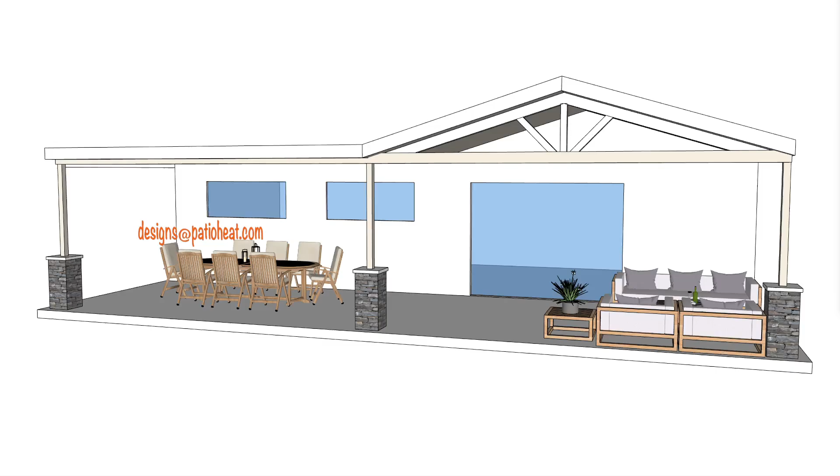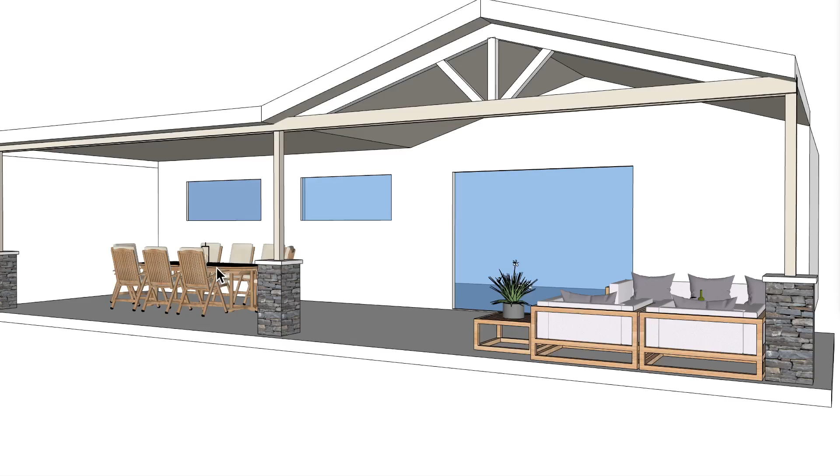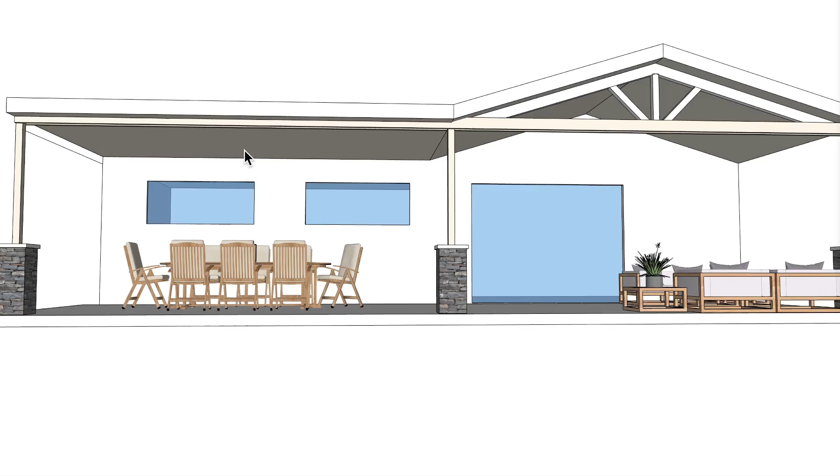All right, so let's go ahead and take a look at this particular application. You can see we have a dining space over here and reclining space over here. This is Alumawood, I believe, on the top section here. So I don't have a complete answer as far as how much weight an Alumawood ceiling can handle. You'd have to talk to the contractor who installed it and/or the manufacturer of the Alumawood itself. But let's go ahead and look at what I would recommend for placement of heaters.

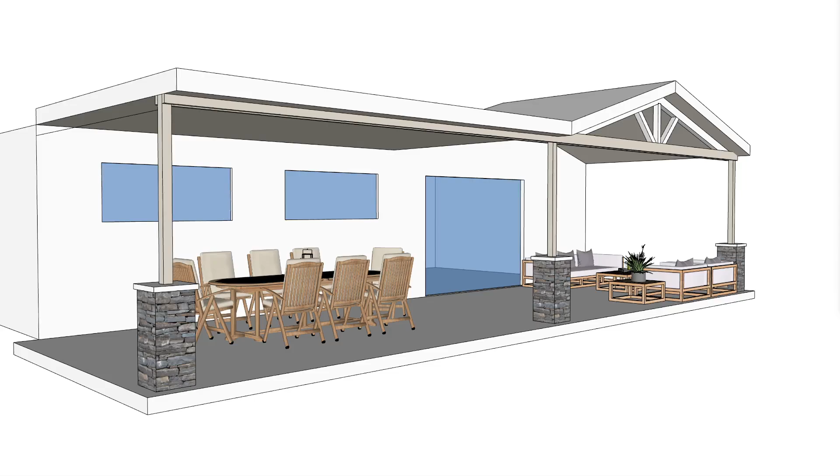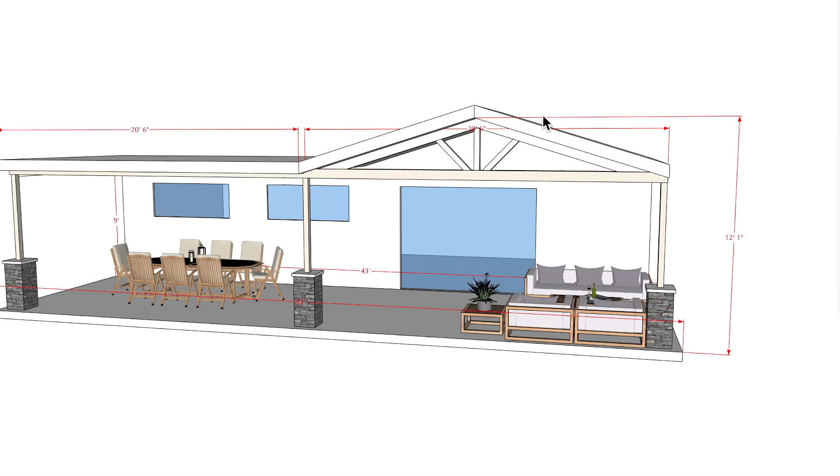Let's go ahead and first of all look at the overall dimensions that I have. So overall dimensions, I have a 9-foot ceiling here. We have a 20-foot 6-inch section over here. And then we have a 20-foot 6-inch section over here from this edge here to this point there. We have a ceiling height of this apex here at 12'1", and overall I think it was 43 feet total. I think that's about it. Let's go ahead and turn that off and look at what we might be able to do.

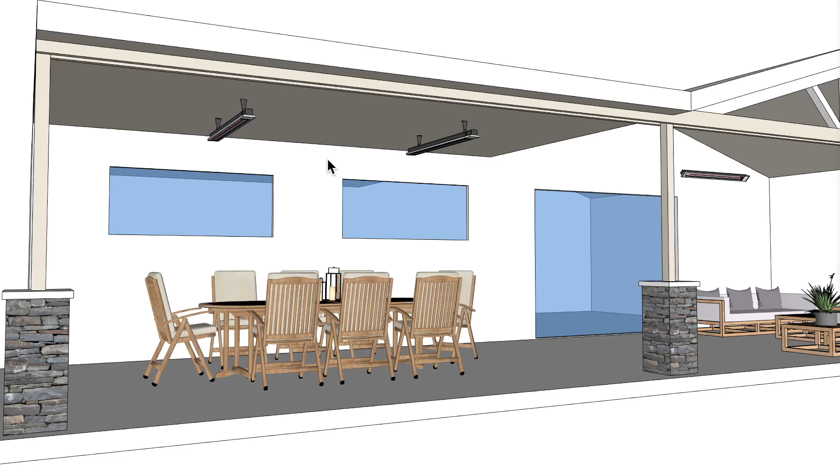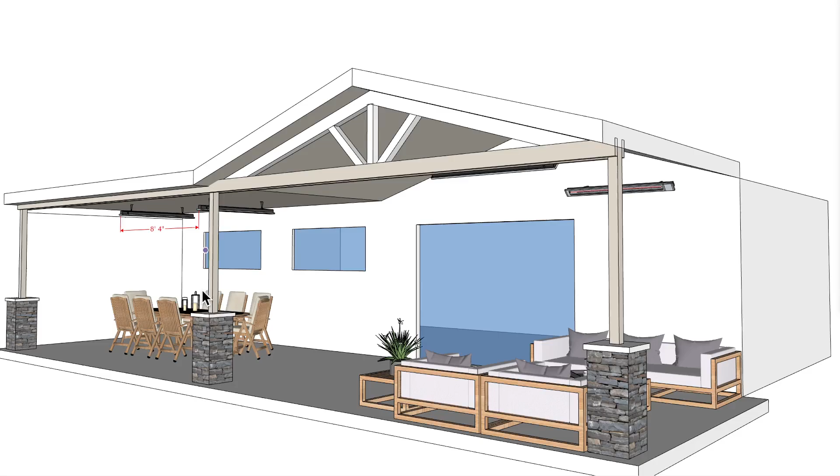So one thing I want to show is probably what would not work, and the reason why I'll show in a second. These two would work here. These are slimline 4,000 watt units pointed straight down. I don't have the distances on here at this moment, but let's put the distance apart from each other, and you can see that the distance is about 8'4", and those again are pointed straight down to the ground. Now, what I have over here is a wall-mounted unit here, as well as the beam mounted over here.

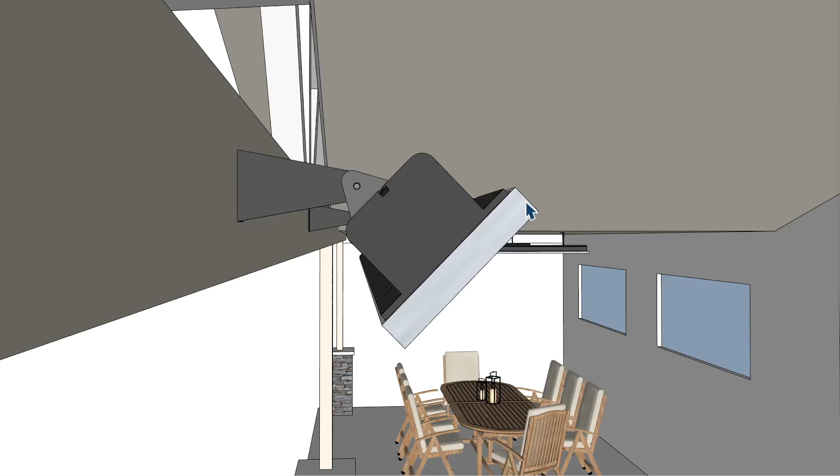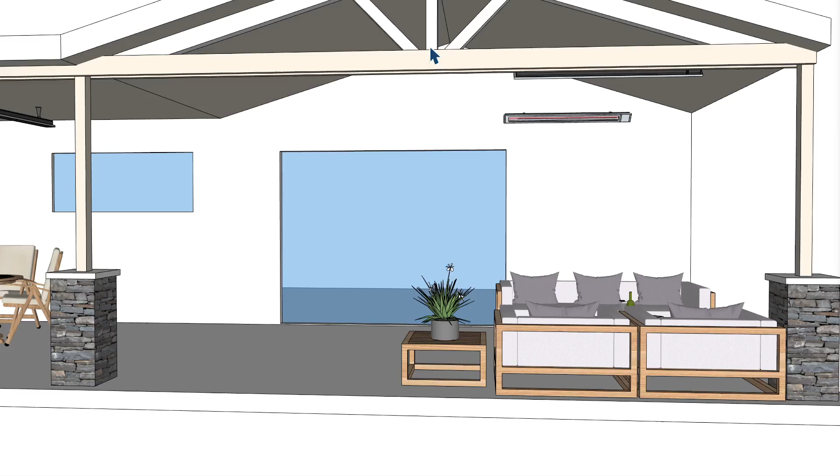So these are vertical surface mounts. And because of that, the bracket itself will only allow for a 45-degree angle. So from straight down to the ground, 45 degrees up is the maximum position it would take. And oh, by the way, I did make a section here. Call this the center point here to the inside edge of the post here, and then I centered the heaters here. But I also made it the same height as this beam here, centered within the beam.

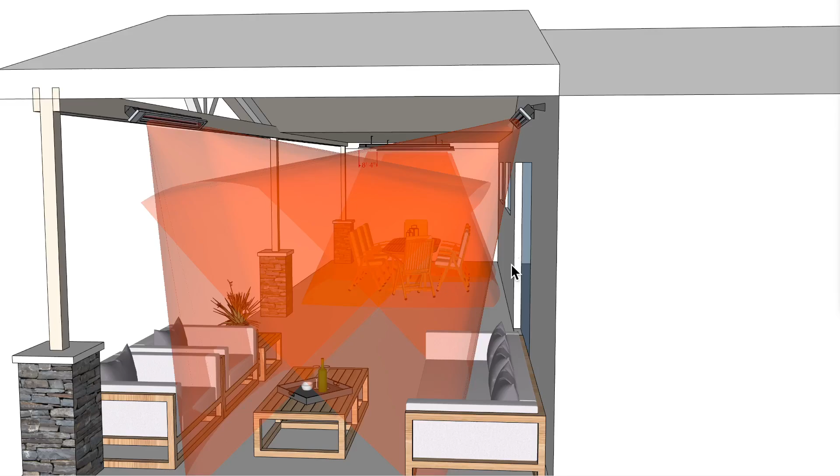But again, if we turn the ray on, you'll see that a 45-degree angle over here is not adequate to heat up the space down below here, nor is it adequate to heat up the space right below the heater here. You need a 30-degree angle, and this bracket will not allow that to happen, so this is not something I would recommend, especially on this side here on the right. However, on the left, this does work out just fine, and it's up to the individual whether they choose these over here or not.

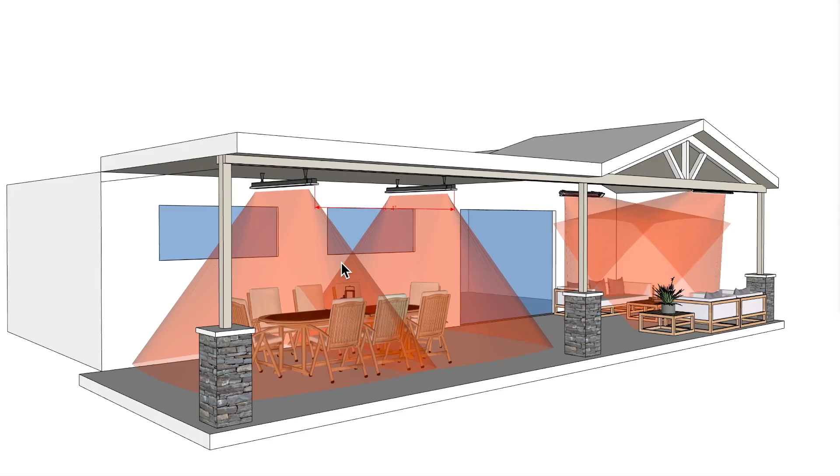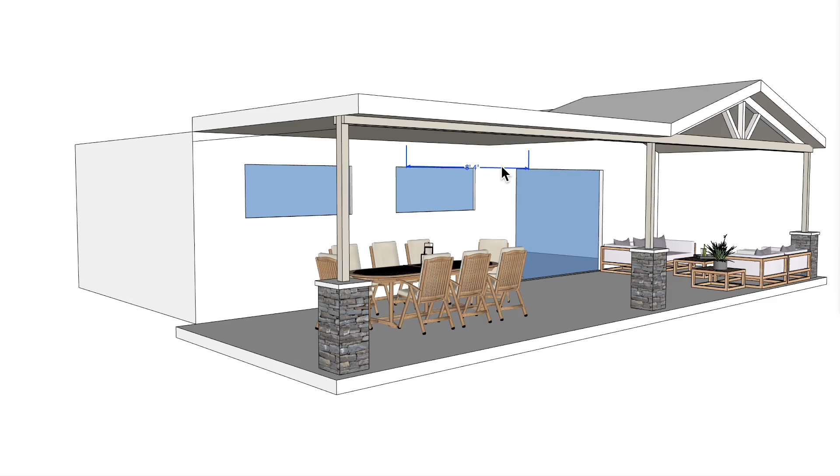And they're roughly about 18 pounds a piece. So as far as can you mount them on the Alumawood surface, you'd have to again talk to the manufacturer and/or contractor in order to get that answer. What I would probably recommend, however, and again the mounting is an issue as far as whether it can handle the weight or not, is probably the C-Series model.

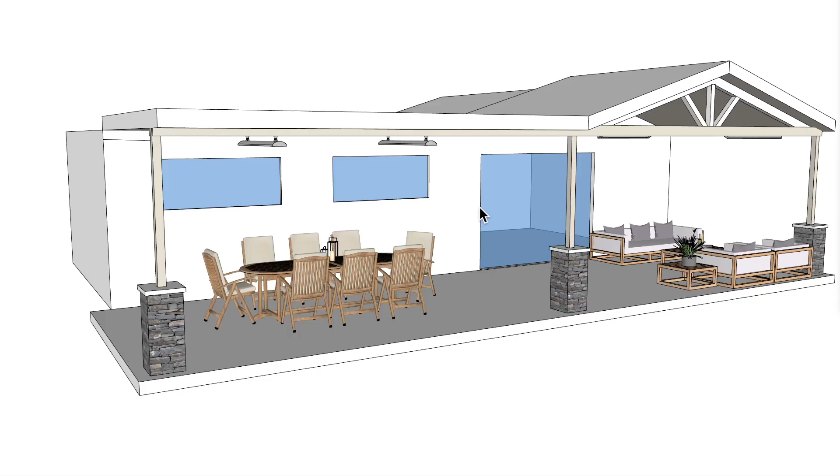The C-Series 4,000 watt unit is perfect for this elevation height of 9 feet off the finished floor, and they're in the same position as I just showed before, centered within the patio structure here, and over here I have them in the same position from this point here center to this point here. That's the center of the heater, and then mounted on the beam going across here as well as over here.

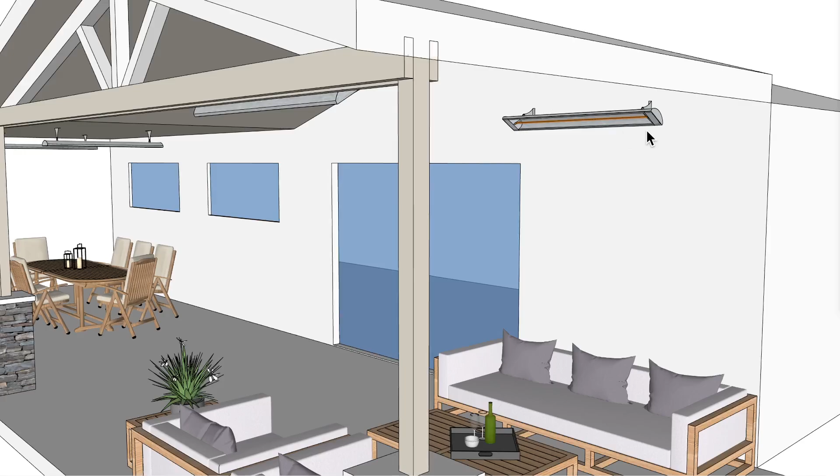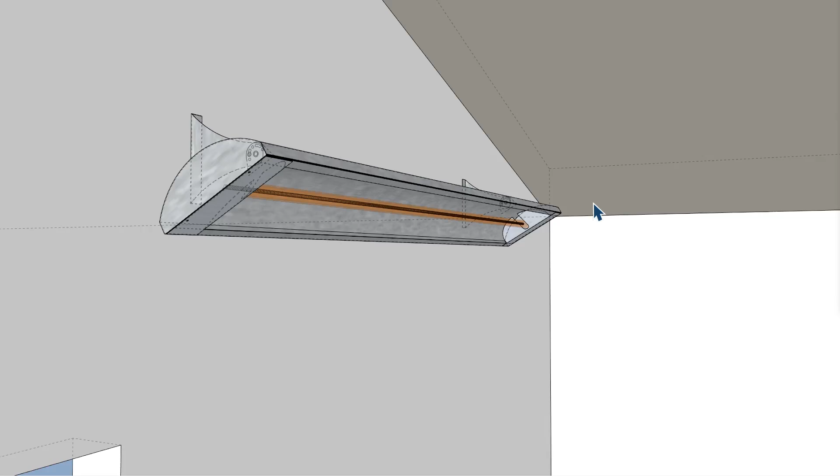Now, the one thing on the C-Series model is that anything above the heater, once you place it on a vertical surface and mount it at 30 degrees, you need to maintain a minimum of 12 inches of clearance. So I'm going to just draw a line right here, and let's see if I can do that here. There we go. I'm going to bring it to over here. And we'll pop it right there, and we'll go 12 inches high just to see what that line would be.

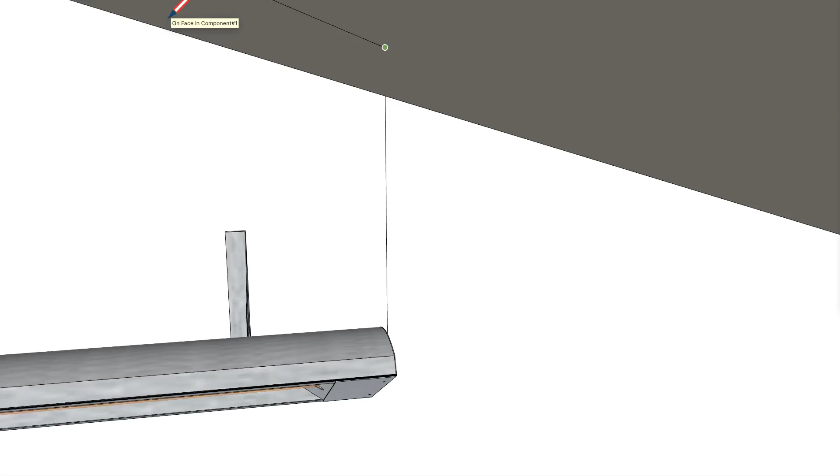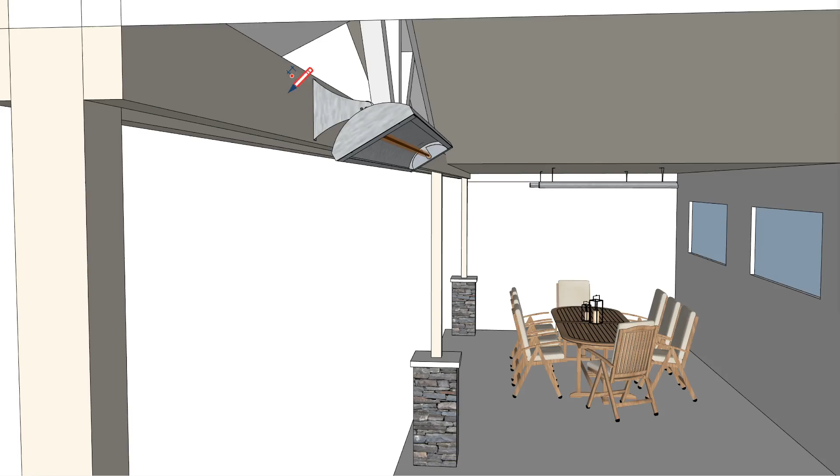And you can see that that line is technically speaking outside of the clearance zone. So this would have to move down. Let's see how many inches I have it lower than. So that's 2 inches lower than what I had this unit here at, the same elevation. Now, to get the exact location of what I have this at, let's go ahead and take a measurement here as well.

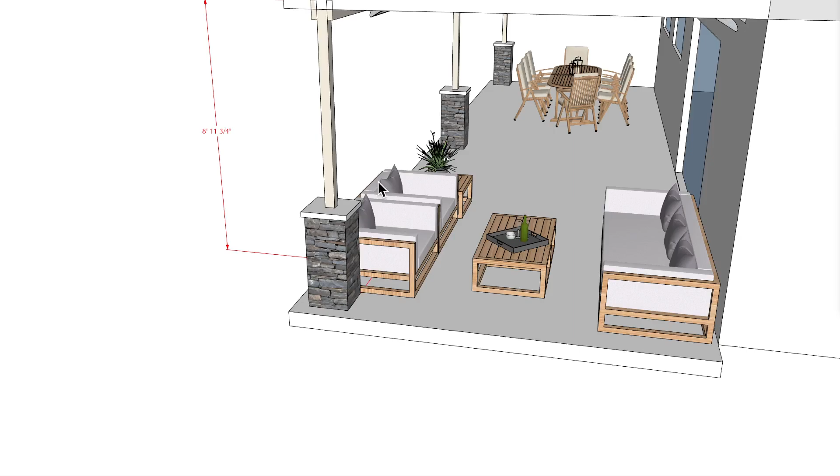So the center point to the finished floor, I have that at 8'11" 3/4, and this is 2 inches. I just dropped this down 2 inches lower so that I can maintain the 12 inches of clearance right above this edge over here on the ceiling portion, which is fine, I think. And by the way, I'm not sure if I mentioned this, I do have these at a 30-degree tilt towards the center point. So straight down to the ground, 30 degrees up.

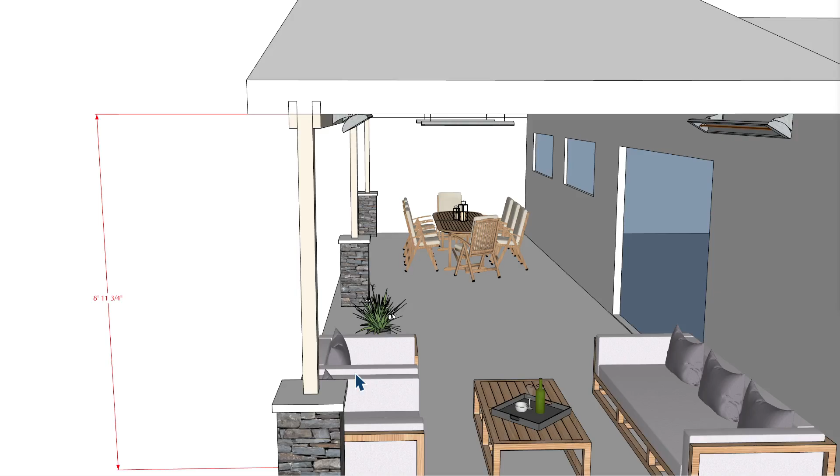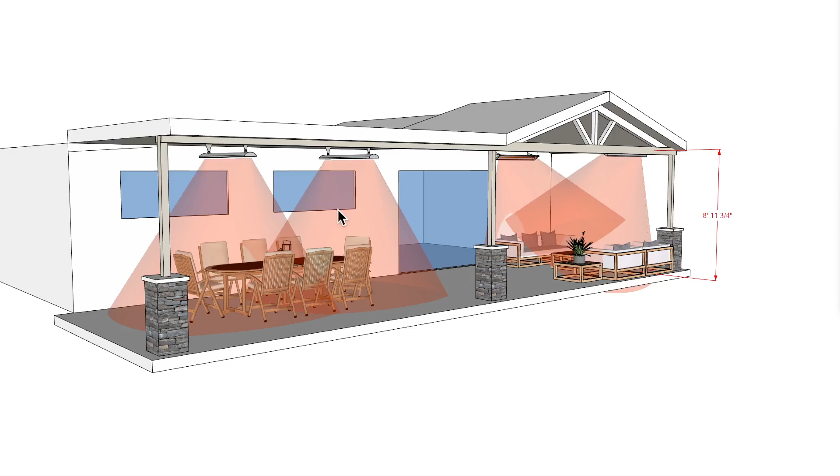And let's go ahead and look at the footprint of heat. And you can see now that we're hitting the sitting positions much better at that 30 degrees. Now 30 degrees is going to be the maximum that you can actually go, but I think that would be ideal for this particular application here. Okay, and then this is the same as I had shown before, and this would be very well heated in this position as well.

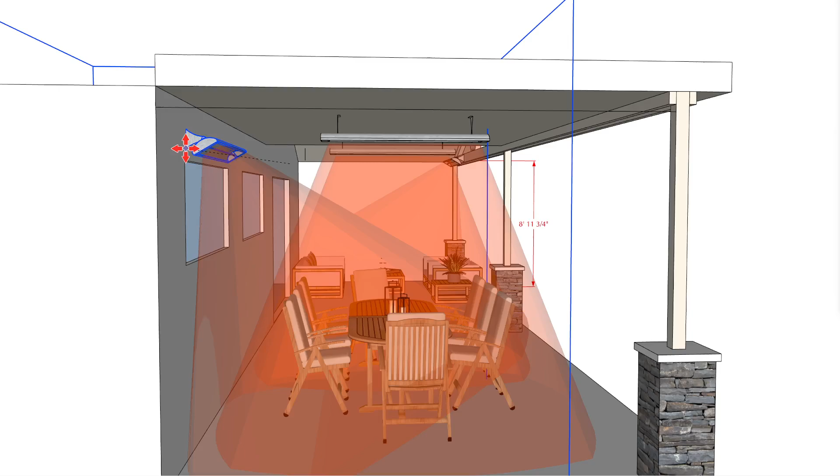Now, let's just say that you determine that the only place that you can mount one of these units is either on this beam going across here or this wall. Again, you would have to move those heaters so that they are 12 inches. I'm going to just bring this over here real quick. It would have to be 12 inches below the ceiling point when mounted like this. So if I put this up higher and then dropped it down 12 inches, that's where the heater would have to be.

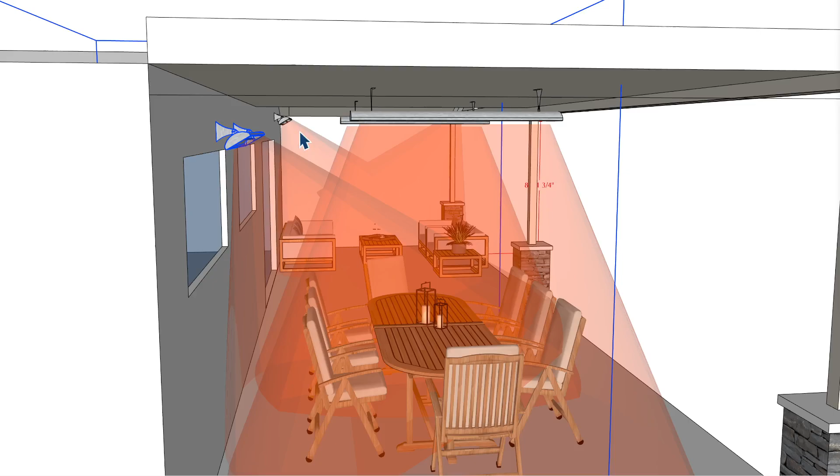And obviously mounting it on that surface wouldn't work because it would not have a component or a place to actually mount the unit itself. So that's why I'm not bringing this up as an example here. So let's go ahead and delete that and stick with what I'm showing here. And I think that's about it. All right, well, I hope this has helped.